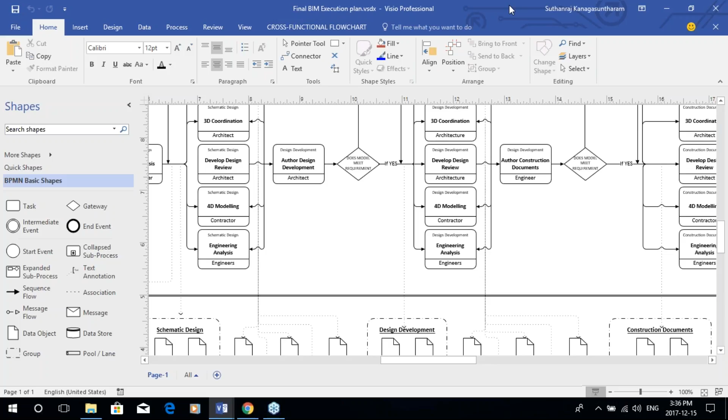Can you see now? No, we're not yet. Did you press it? Did you press the share button? I'm going to make you presenter again. Try again. There we go, okay, we see your PowerPoint now. Excellent. So now if you go into presentation mode - there we go, perfect.

Hey guys, okay, you want to continue on now? Yeah, perfect. So this is our project information.

This is the high-rise building project. The building has 2 towers with a common commercial podium. This location is Ottawa, and the contract delivery method type is design build.

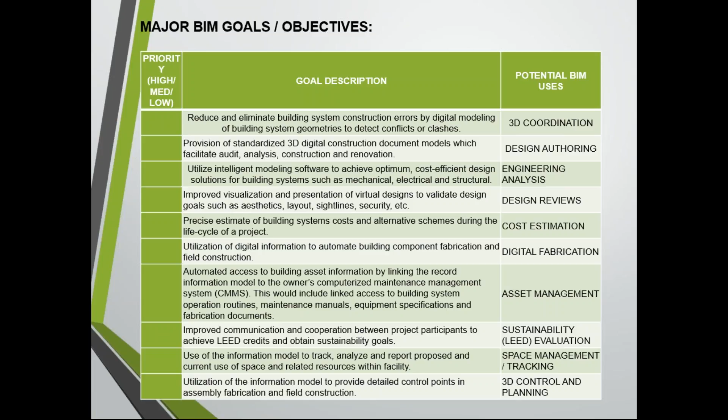Just looking at this list here, there's 3 on here that would be a definite high priority. And then the rest probably a medium, unless the text specifically said something off the bat. So just definitely give an idea of what you think the prioritization would be on these, on the goals. Okay, yeah, yeah.

So these are the BIM uses we're going to use, like we need on the project. So it's like mark with X for the operation, construction, design, planning phases.

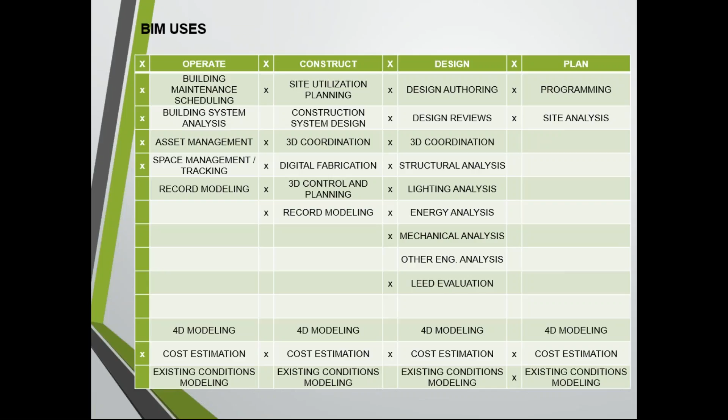The one comment, sorry, if you go back - the internal connection to the architects, connecting those 3 offices by WAN would be a challenge. Sorry, because of connect - I did that, but yeah, sorry, connecting Ottawa. Use the previous slide. I corrected it, but I used... I'm sorry for that, like they are connected with the C4R. Okay, cool, yeah, so just check, make that correction. Yeah, because the WAN to Delhi would just be very challenging. Yeah.

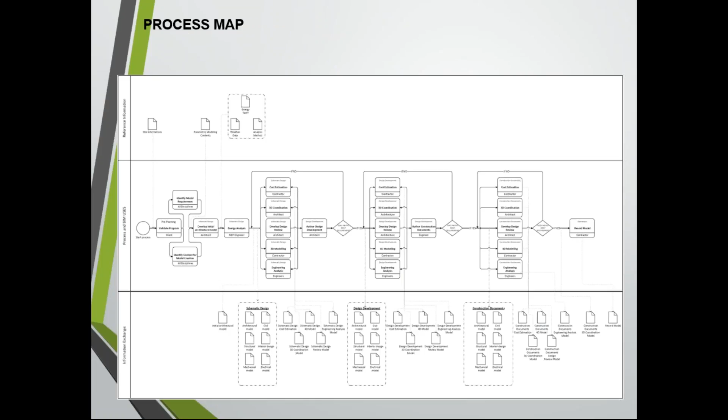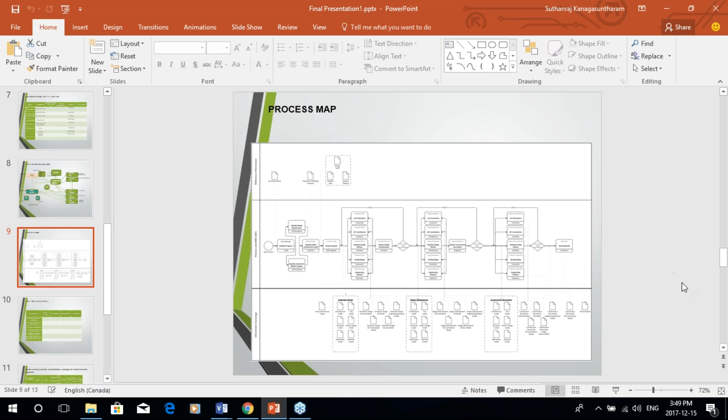So these are the process maps for the whole project. There's a B - there's 4 phases, I mean pre-planning and schematic design, and design development phase, and construction document and construction phase.

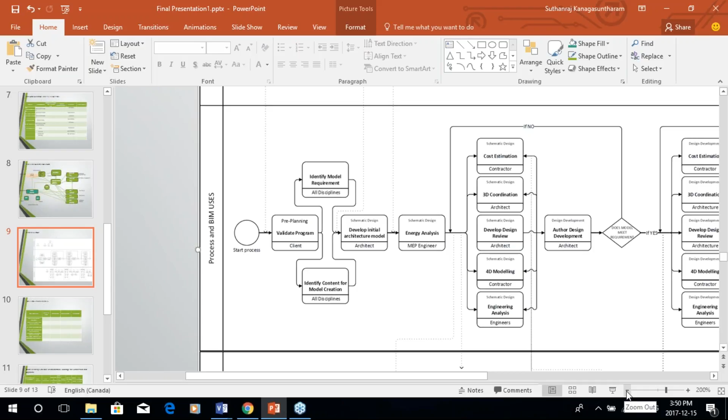We include the process mapping on this set, and also I think make sure, like when I check it, when I review the documentation, the 5 elements or the 5 uses you have in schematic design and then in design development, make sure it correlates to the selected BIM uses on the chart, right? And if there's one missing, that's where the provided Visio or PowerPoint from the execution plan template lets you augment it, so you're showing the uses that apply. So just make sure the 2 correlate to each other.

Okay. Explain a little bit.

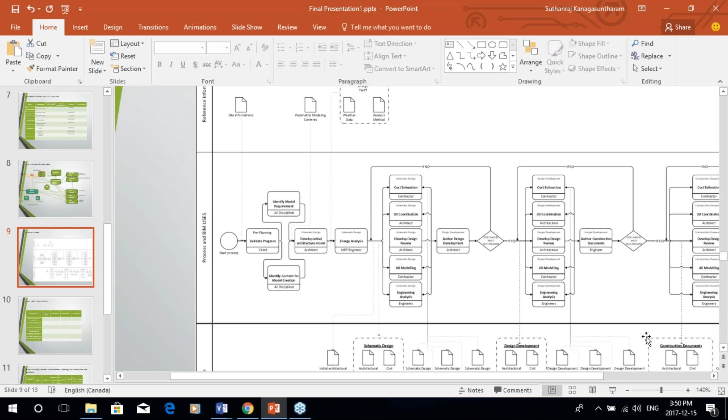In the process we did schematic design analysis. After that, we did energy analysis on the model. Then we start the design development process for all models, and we get the results. If we meet the requirement, we will do the next phase, or we will do again the same assessment for those models. Each phase we get the information exchange output documents on the bottom tool.

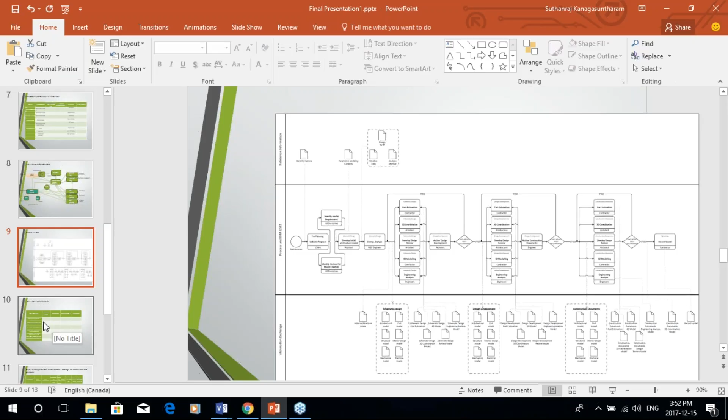This is a meeting procedure, like when we have the meeting, we have the first kickoff meeting, and then after that it's a BIM execution plan development meeting, design coordination, and construction over the shoulder. These are the meetings.

So for the last row there, the 'any other meeting' - think about that because specific with the asset management or the analysis, if there's any other type of meeting you think could go in there, might be worth adding, like potentially an owner review or a data validation. Remember, you've got the AConnect system where you're feeding and publishing the information. There may be a need to validate and review what's going through that, right?

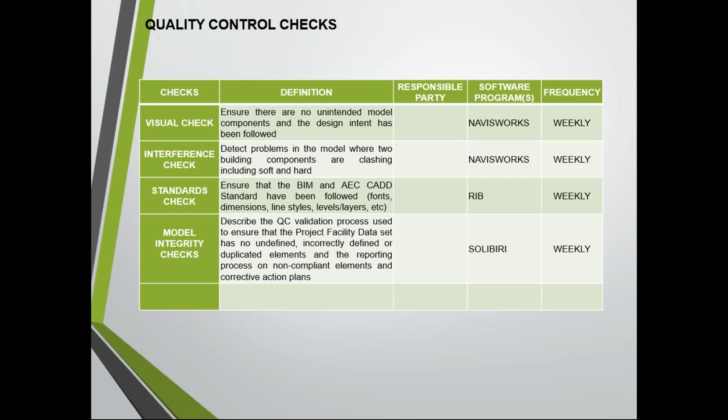So this is for the deliverables. First are the stages - design stages and construction stage. For the design concept phase, we chose LOD 100 to 200. For development, 200 to 300. And for the whole construction documents, like working drawings, LOD is 300. There is an estimated delivery date, and the project stakeholders involved.

And the stakeholders - the last one there, it's into the closeout phase. That's correct. If I was a real project manager, I think this would lead to quite a bit of dialogue. The completeness of an LOD 500 model and what that actually means is still something that gets debated quite a bit, and then the responsibility of the contractor versus the designer - expanding into all the legal discussions.

Just as a BIM coordinator, that last line would generate quite a bit of dialogue. Like, I thought LOD 500 is the complete building after construction. Right, but that's the whole point - when construction is completed, you're basically left with an as-built, operation-ready model. Usually the designers are long gone.

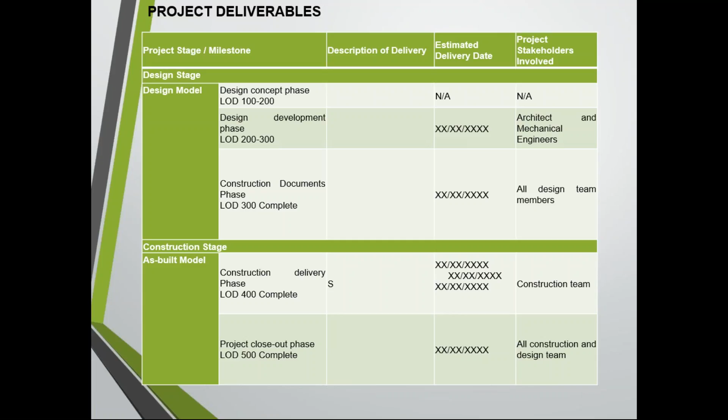So... yeah, that's it. Cool, okay.

No, very good. So adjust some of those comments I had. The one thing I'd recommend is adding in the software solution, like a diagram for the software as well.

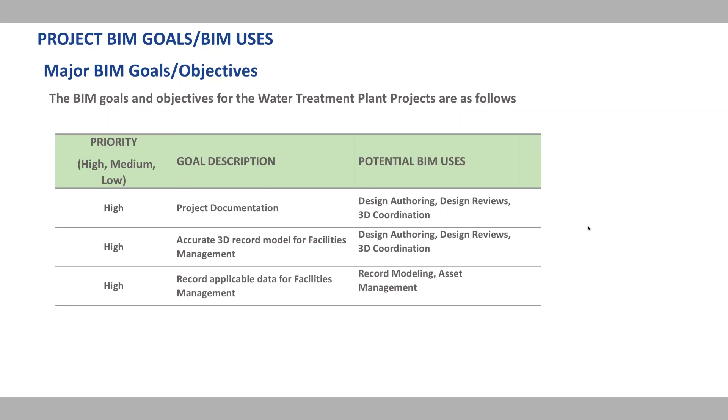So BIM uses for the 4 phases: for pre-design it'll be program and site analysis. For the design phase it'll be design authoring, design reviews, 3D coordination, and potentially structural analysis, mechanical analysis, and lighting analysis. Construction phase will be 3D coordination, record modeling, 4D modeling, and cost estimation. And the operation phase, potential BIM uses will be for asset management and record modeling.

As BIM coordinators, this is most likely a heavy slide where you should be ready for a bombardment of questions. Depending on your audience, a project manager may or may not be familiar with what these mean, especially 4D modeling, which might cause confusion. So when you do this, have the execution plan template at hand with descriptions of all these uses. I often keep a slide deck set aside that I can pop open and show an example. Keep that in mind in the real world - right now you're speaking to someone who knows the stuff, but often a client might just say, why, and what does this mean? And, you know, money - sometimes that's all they think of.

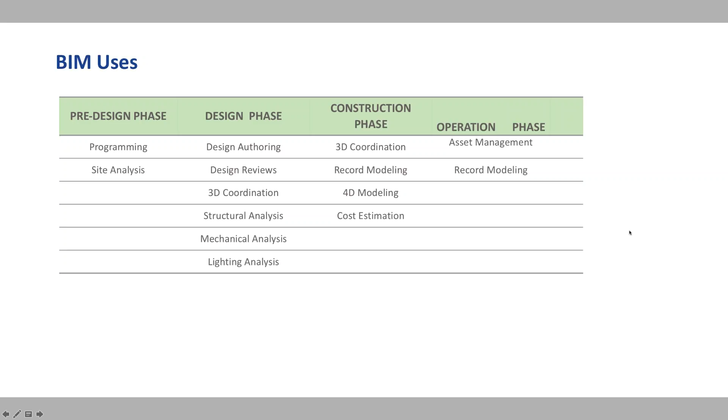So next. Lydia, you want to talk? I think I'm the next one.

So, the organizational roles. We have the first one, project manager, and after that BIM manager, architect, structure, mechanical, electrical, civil, construction manager, cost estimator. Just one missing, I think, because it's a water treatment plant.

Make sure you account for the piping engineer. So in the list of disciplines, process piping. So what would it be called though? Usually it's called a process engineer. So, process engineer, okay, and that's one.

Oftentimes they get confused with mechanical. There's building mechanical and process mechanical, which are usually the distinction, but process is a distinct discipline for this project, different than the previous one - that's why I hinted at the curtain wall, for example, because high-rise buildings have that type of uniqueness, but here it would be process.

So it's just an overall description for the main roles. Sometimes they are mixed up, so it's just a definition so that everyone would know his role and responsibility. It would be much easier for collaboration.

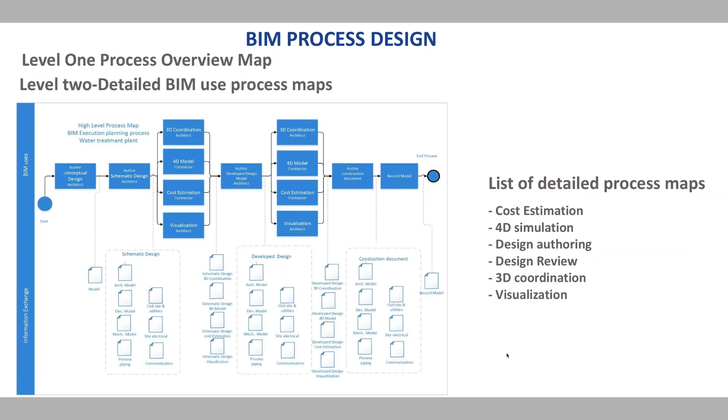Now the collaboration diagram. Our strategy was that we have multiple firms in multiple offices in multiple countries. So the main collaboration solution was ProjectWise Cloud for all parties to share, and some will be working the work in progress in it, except for Revit, which is only in one office, so they'll have their own lane and just publish and share to ProjectWise.

For the deliverable, it will be published from ProjectWise and also from MicroStation for the 2D drawings. Same here for the process piping and communication—they'll be having a lane, and their iModel is going to be published to ProjectWise.

For the shared publish to the LAN, I would put a bi-directional arrow, because it's going to be pushing to ProjectWise and pulling back from the LAN. The architectural team's struggle will be to continually make sure their stuff is current, whereas the rest of the building and site teams will always see the current stuff. So we need a bi-directional arrow there, and the same for the ProjectWise to LAN of the piping guys—they'll be pushing and pulling as well.

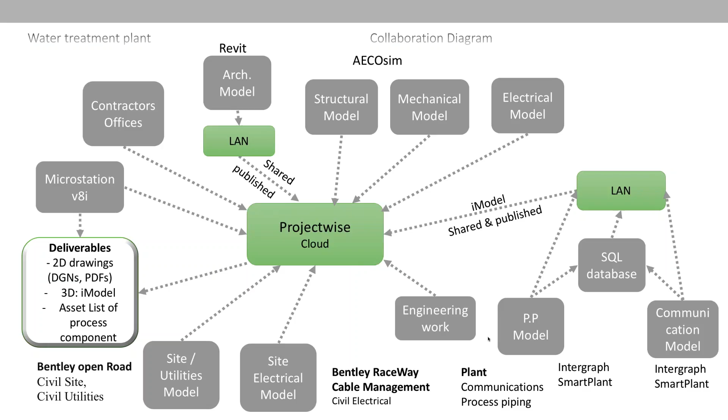Next section is visual check, quality control. The following checks should be performed during the design and construction process to assure quality. A visual check to ensure all components are in place, using Revit, AECOSim, and Solibri. Interference check using Solibri. Standards check to ensure BIM standards have been followed, using Revit and AECOSim.

So the only comment I have is where you have Revit and AECOSim, you should probably also add SmartPlant, because the piping model will be a critical piece. For the interference check, it'll be an interesting challenge going from SmartPlant to Solibri through the IFC file—not impossible, just an intriguing workflow. I think it's a good solution, just make sure everywhere you have Revit and AECOSim, make it Revit, AECOSim, and SmartPlant, so you're not forgetting the piping model, which is a critical part of water treatment.

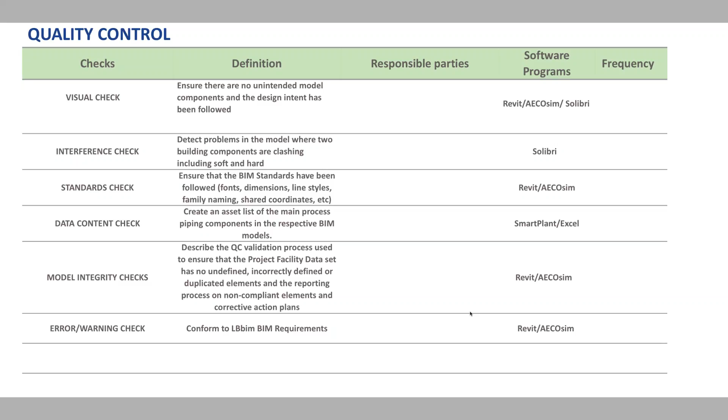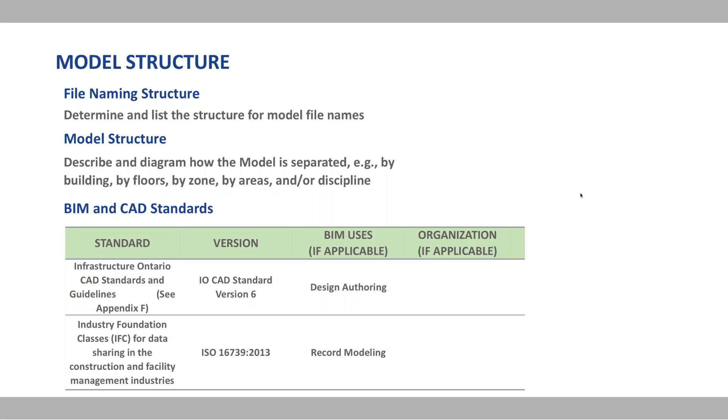Next, model structures—the BIM and CAD standards. For CAD, the standard will be the Infrastructure Ontario CAD Standards and Guidelines version 6 for design authoring. For BIM, it will be IFC for data sharing and ISO 16739:2013 for record modeling.

For project deliverables, based on our employer information requirements, the main deliverables are 2D drawings in the construction stage and closeout, the iModel in the construction and operation/maintenance phases, a record model for closeout, and an asset list for operation and maintenance.

But taking into consideration that BIM is not just about deliverables, we are adding value to the project—increasing efficiency, reducing waste in design and construction, and offering the client a better product with less cost and more certainty about the final output. The value and service we're offering includes extra services like model review for clash detection, reports for the design model, and visualization for better understanding the output before construction.

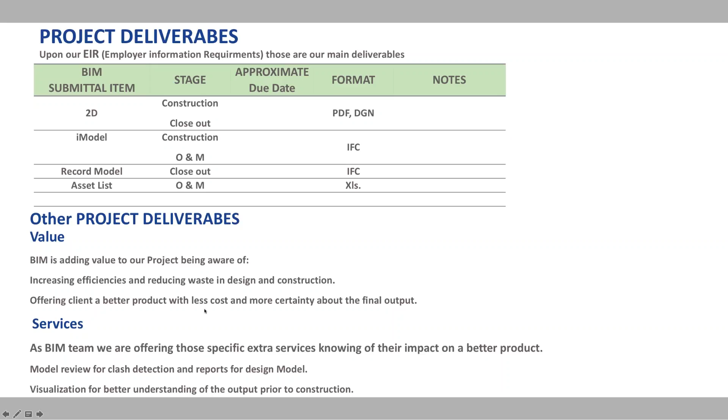This leads us to the assessment. Since BIM provides less cost in the future of the project, we are offering a solution for the assessment problem, which is the IT infrastructure. We're proposing a budget for the IT infrastructure for the firm having problems.

If approved by the owner, it will be much better for the output and future profit. If that's not possible, we can try to control the number of users for the internet connection—who will be using it when—so it could be much better. But if the owner considers the future profit and less cost, he'll go with the first solution.

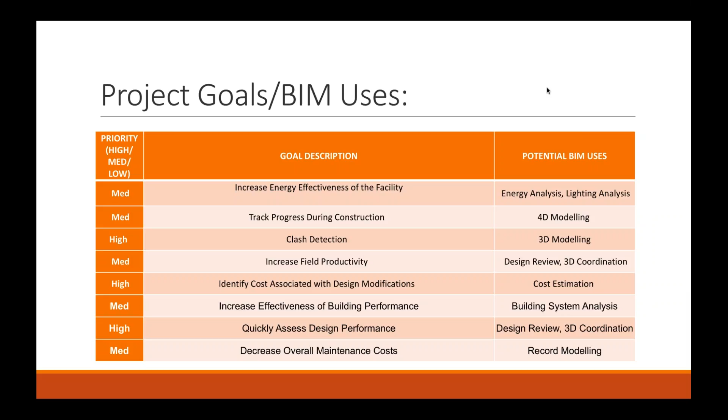So just before you go, the other one, the BIM design authoring, we should probably have a high priority goal description of just efficient development or production of drawing output or something of that nature, with the BIM use being design authorship, and that should be added in this table as well. Yeah, okay, cool, okay, thanks.

Yeah, no, that's fair. And as a BIM coordinator, I think that's a fair comment that you would bring forward to your project manager and say, this is a suggestion. But yeah, I remember, I always say BIM doesn't happen in a vacuum, right? So knowing that there's these questions, we have suggestions, but it depends on project management, project budgeting, the project controls, costs, everything, available staff for this. So the burden wouldn't be on you to make the decision, but a suggestion is always a good place to start. So that's good.

Okay, and the major architectural firm will be in London, so design authoring and design reviews will be in London. And next is cost estimation, that is from Toronto, and record modeling again from London, and energy analysis there's Ottawa, a firm in Ottawa of mechanical and electrical. So I guess energy analysis will be from Ottawa, and site utilization planning will be from Delhi. Okay, next.

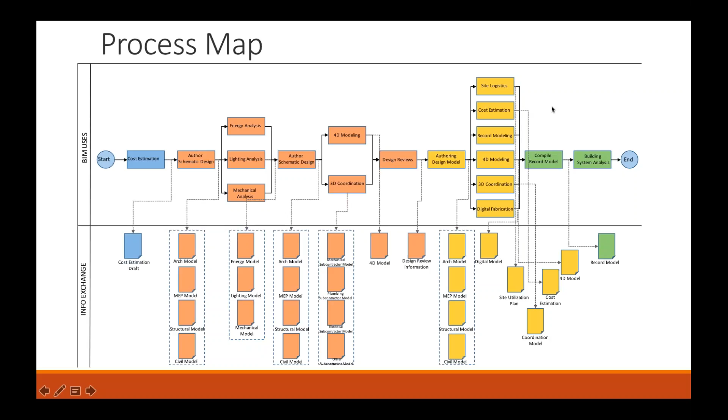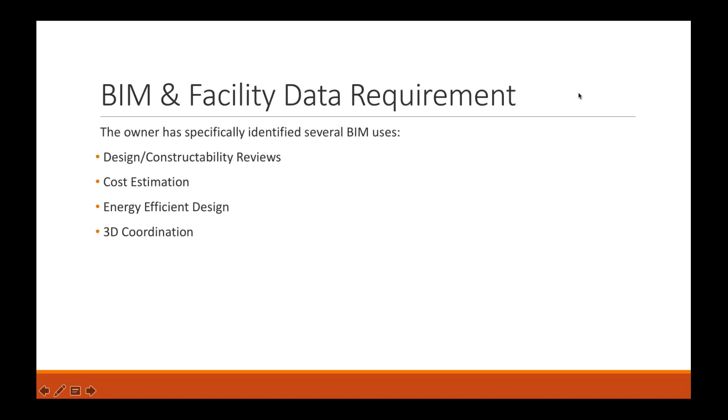Next is BIM and facility data requirements. So the owner has given some requirements as design and constructability reviews, cost estimation, energy efficient design, and he wants to be a part of 3D coordination.

On this slide, we're going to talk about the collaboration. We have the architecture firms in London and Ottawa, civil firms in Montreal and Toronto, mechanical and electrical in Ottawa, landscape in Delhi, structural in Montreal, and interior design in Ottawa. The architectural, mechanical, landscape, structure, and interior design firms will all collaborate through C4R. The civil firms in Montreal and Toronto, on a project-wise basis, are connected to all and collaborating through ProjectWise and to each other.

The comment here is that the landscape architecture brief lists them as using AutoCAD, so they won't be able to go through C4R because that's Revit only. So they're going to have to go into ProjectWise. And don't forget about the electrical schematics.

Electrical is tough because they're going to have the Revit model for, I hate saying normal modeling, but then the schematics for wiring diagrams and everything of that nature. So they're going to have the Revit piece and the AutoCAD piece.

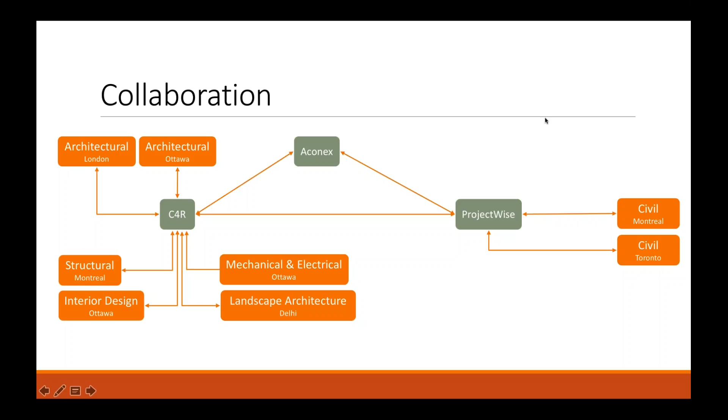Next is the meeting procedures. The BIM requirement kickoff that will happen once at the preliminary planning stage will include the architects, engineers, client, and the contractor, so they have an idea of what is going on.

Of course, the meeting cannot be in one place only, so they're going to use the web to share the presentation between Ottawa, London, Montreal, and Toronto.

The BIM execution plan demonstration will happen monthly, and it will involve again all the participants: the architects, engineers, client, and contractor, and it will happen over the internet. It's demonstrating how the BIM execution plan is being followed, so it's open, clear, and transparent for all parties involved.

Design coordination on the design development happens weekly, including the architecture firms, engineering firms, and contractor in Ottawa and London, and maybe also Montreal and Toronto.

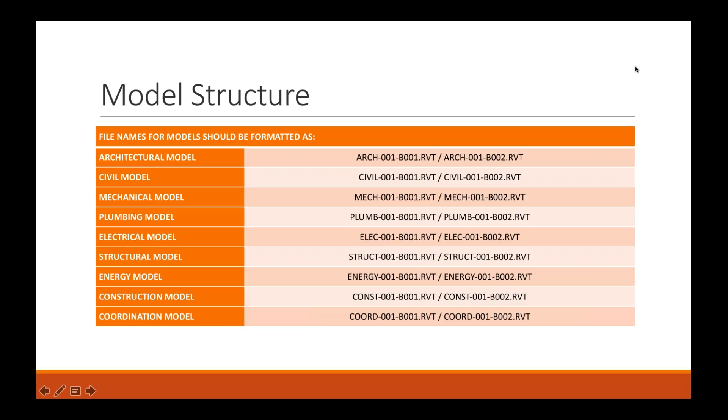Good stuff. Sorry, I have to go through, sorry about that. Okay, yeah.

And for model structure, we have separated building 1 and building 2, and as Vitor said, the common podium will be part of building 1. The floor separation is also according to different floors and different disciplines: architectural, mechanical, electrical, plumbing, and structural. It can also be used for the site planning and execution, according to different zones.

And the standard measurement system will be metric. And we are not sure about the reference coordination system.

So, right. I like how you put that. When you present this to a project manager, prior to that usually there would be coordination with the civil team, because as a BIM coordinator I would argue you should never say what the coordinate system is. You would probably be tasked with obtaining it either from a land surveyor or from the project's civil team, and then that could be documented, going from Civil 3D to Revit and doing all that.

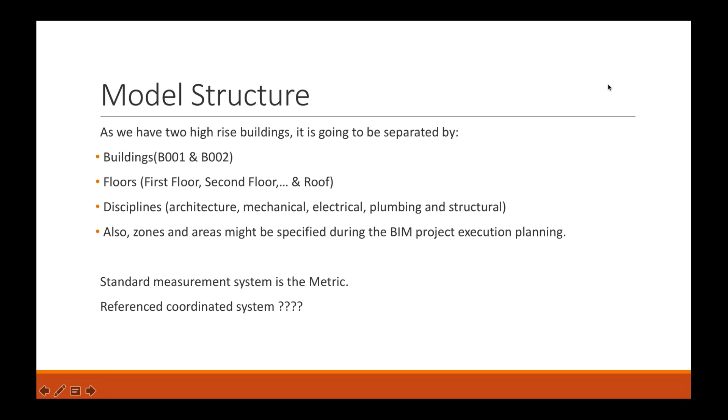Okay. Awesome, oh good job. So again, yeah, address the comments, get everything uploaded by next week. But this was honestly, guys, everybody was what I was hoping for. So yeah, not that I'm speechless, because that's rare, this was good.

And for me, just thinking of all the BIM coordinators I've hired and trained, the test of this skill today was to say, here's the criteria, here's bits of information, not everything, but some. Put something together, stand up in front of a stakeholder and tell them about it. I cannot tell you how often this happens. Last Monday I was summoned to go to New York, which is great, you always want to go to New York City, you don't say no to that. But I had to stand in front of a client and talk about our approach to BIM, a couple of technological solutions, and why we would want to do it. And it was just, come and do it, and we do it. This is the whole thing, right?